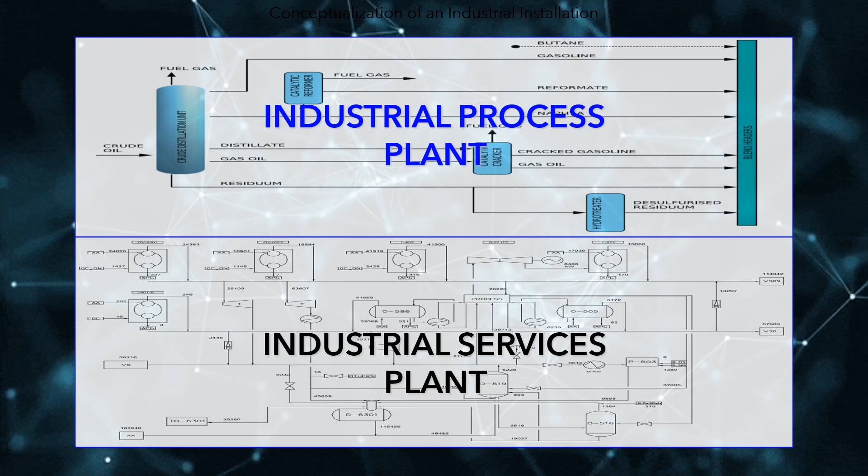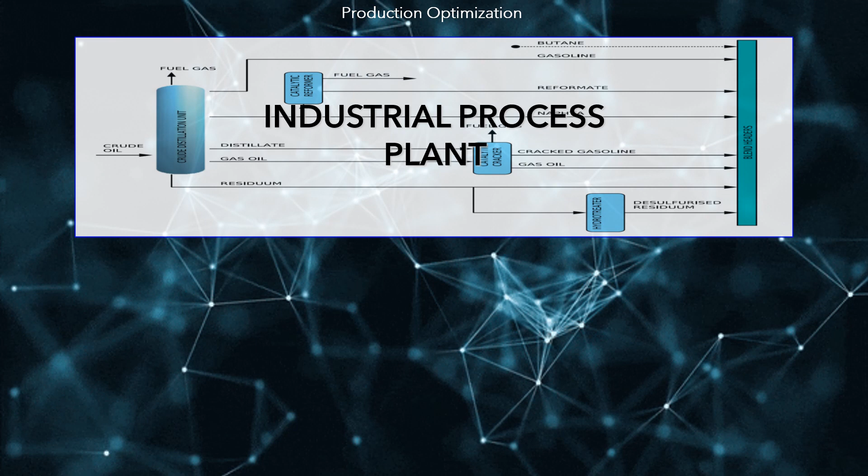To optimize energy efficiency, the first step is to optimize the integrated supply chain, since this is the part of the production process that consumes more economic resources. This lecture focuses on the mathematical modeling of service plants.

HAI-OIL-REF includes a generic model that can serve to plan, at the aggregate level, the crude and/or biomass refining processes. The level of aggregation is fundamentally related to the nonlinearities associated with this type of process, but not with the level of detail with which it is possible to represent the production processes, which can be spatially detailed in all units used in the production of refined products.

The objective of optimization is to determine the production plan that meets the demand for refined products, according to an offer of available crude types during the planning period.

Industrial services optimization is the complementary model to the production model, aimed at optimizing energy management in industrial plants that include large-scale industrial service plants, such as refineries, petrochemicals, oil and gas production, and oil and gas transport.

These services often include self-generation, cogeneration, and the exchange of energy with the interconnected electricity system. The objective of the model is to minimize the consumption, or cost, of the energy required by the industrial processes, supported by the industrial services plants.

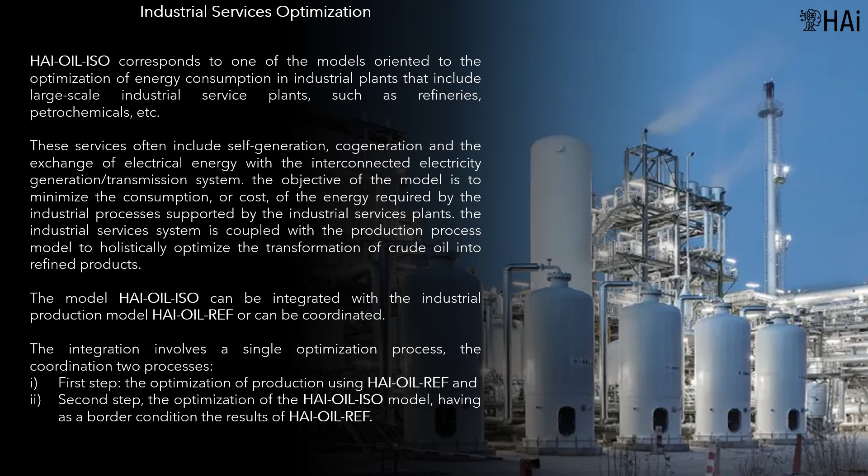The industrial services system is coupled with the production process model to holistically optimize the transformation of crude oil into refined products. Demand fluctuations are typical of utility or thermoelectric plants in petroleum refineries.

Among the major causes are changes in the oil feed properties, multiple operational campaigns, maintenance of process units, interruption of electric energy supply, and cost variations of fuels and electric energy.

On the other hand, utility systems are essential for the operational feasibility of refineries. They must continually adapt their production levels to satisfy such dynamic demand patterns.

Therefore, the designs of utility plants tend to present a high level of flexibility, thus allowing multiple operational configurations that satisfy the same demand targets, sometimes with significantly different operating costs.

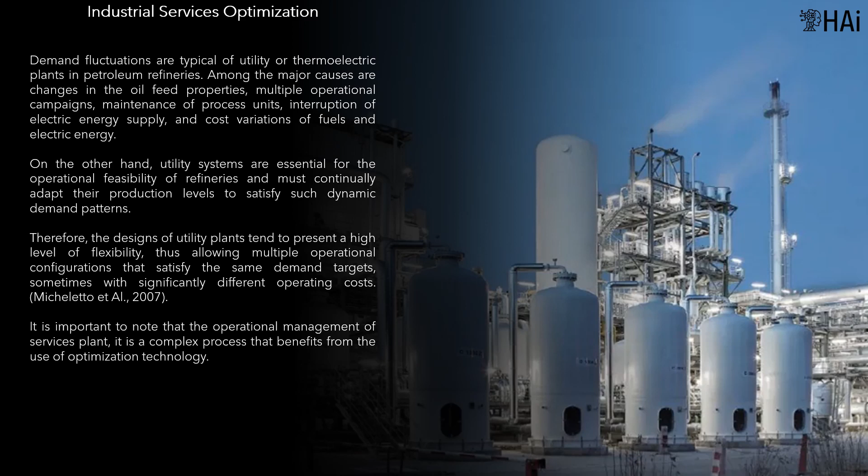It is important to note that the operational management of a services plant is a complex process that benefits from the use of optimization technology.

The main entities of the system are: process plant, a place in which various industrial operations are developed, including unit operations, to transform, adapt, or treat a particular raw material, to obtain products of greater added value.

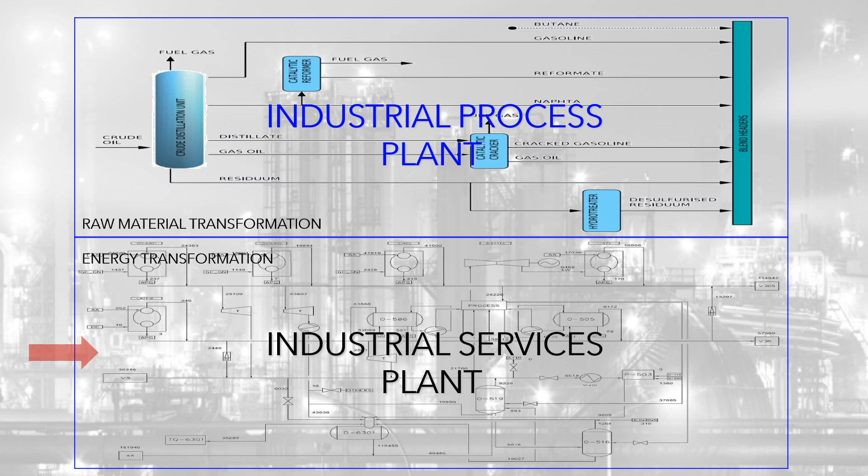Service plant: a place where various industrial operations related to the auxiliary services demanded by process plants are developed. Auxiliary service: essential services for the operation of any production system, they allow guaranteeing the quality and continuity of the process.

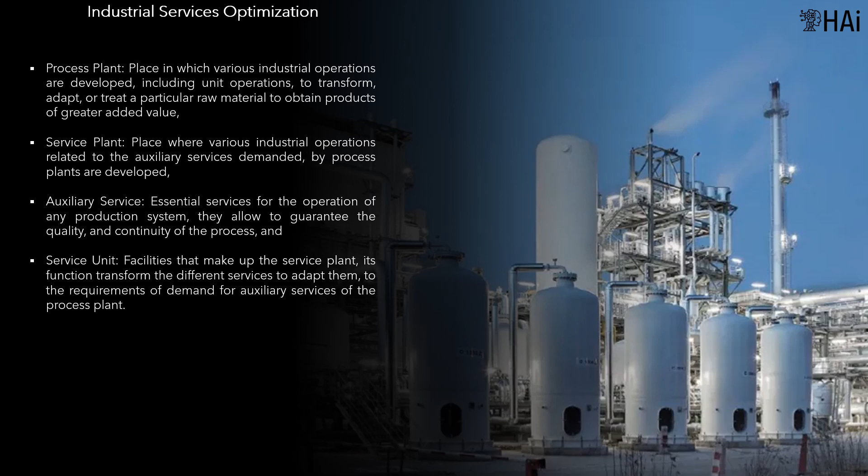And service unit: facilities that make up the service plant, whose function is to transform the different services to adapt them to the requirements of demand for auxiliary services of the process plant.

The processes that govern energy exchange and fluid dynamics are nonlinear processes. The optimal point of operation of the units of the service system varies depending on the flow, the temperature, and the pressure handled by the unit.

Efficiency is a nonlinear indicator of great importance, with which the amount produced can be related compared to the amount of raw material used. For the management of this indicator, it is necessary to have an adequate data acquisition system, which ensures the correct measurement of the parameters that facilitate its use.

In service plants, we find different types of units that interact and interconnect with other units to transform one service into another service.

Different types of service units are used to describe the process, although the diversity of units and functionality of each of them is clear. Within the modeling, they will be considered as a single entity, characterized by the value of the parameters that define it.

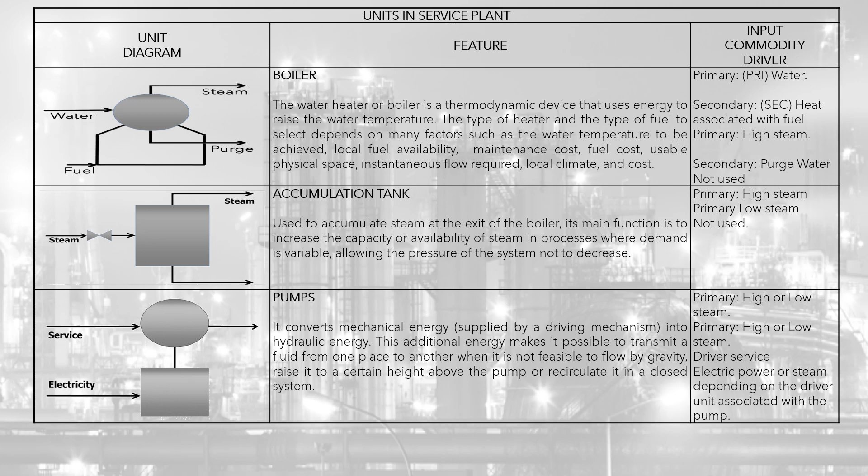These parameters refer to input, product, and driver. The table presents the main units that make up the service plant, and their basic functions.

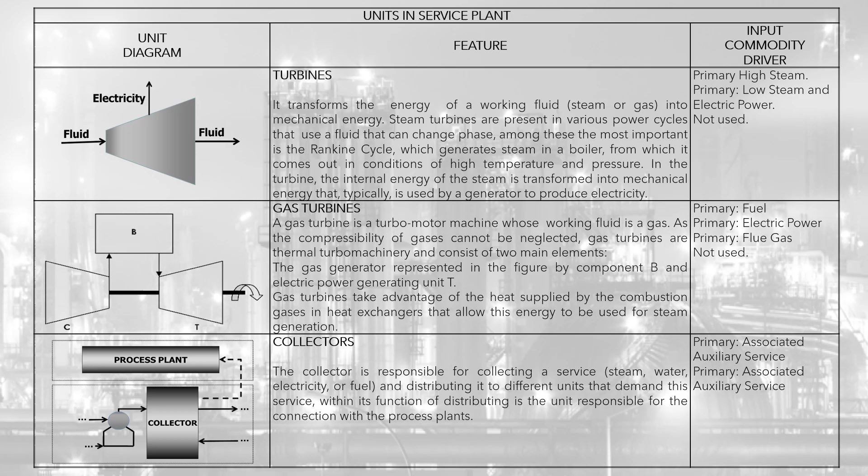Units such as pumps, boilers, accumulation tanks and valves, condensers, manifolds, and steam turbines are specified. Icons are included to manage the connectivity of the processes, something typical for the engineers in charge of handling the diagrams of the plants.

There are other fundamental elements for the proper functioning of the service plant, such as measuring units to control the operating conditions of the units, such as pressure gauges, thermometers, water level indicators, flow meters for steam, alarm and control devices, among others.

These elements are not handled as entities within the mathematical model that represents the service plant, but they are of great importance, since they make up the data acquisition system, fundamental to the state estimation modeling process.

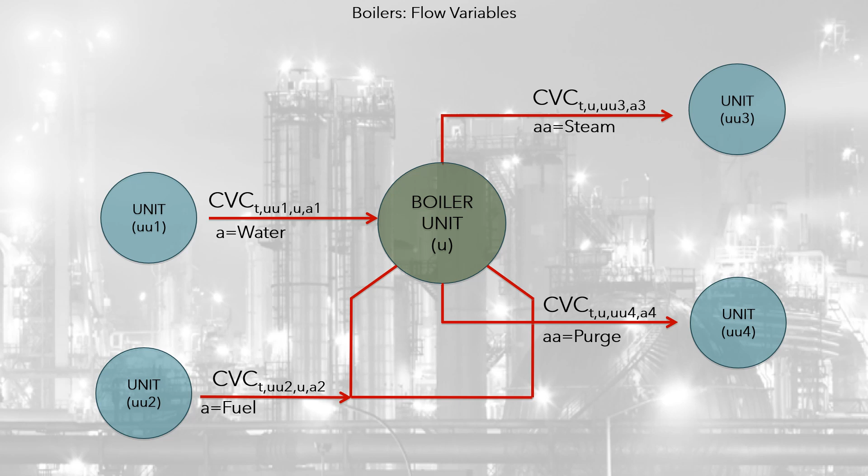The interaction of the auxiliary services plant with the industrial process plant is carried out through the demand made by each process unit. This demand can be exogenous, when the industrial service plant optimization model is connected in series with the results of the industrial process plant models. This type of connection is called coordinated.

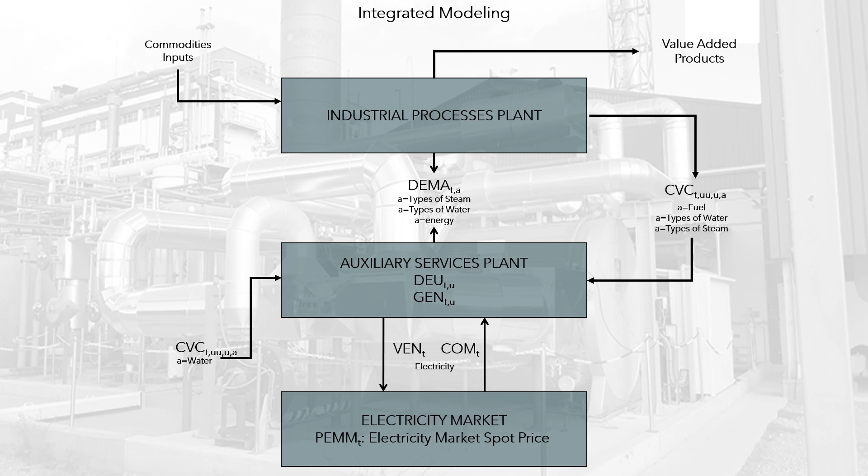If optimization is performed integrally in a single model, the demand will be one of the decision variables of the model. This type of connection is called integrated. Integrated models, if they can be solved, produce greater benefit than coordinated ones.

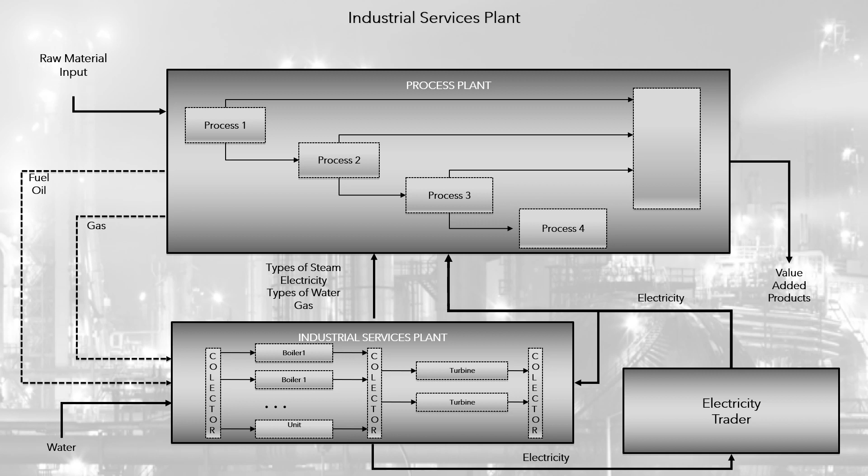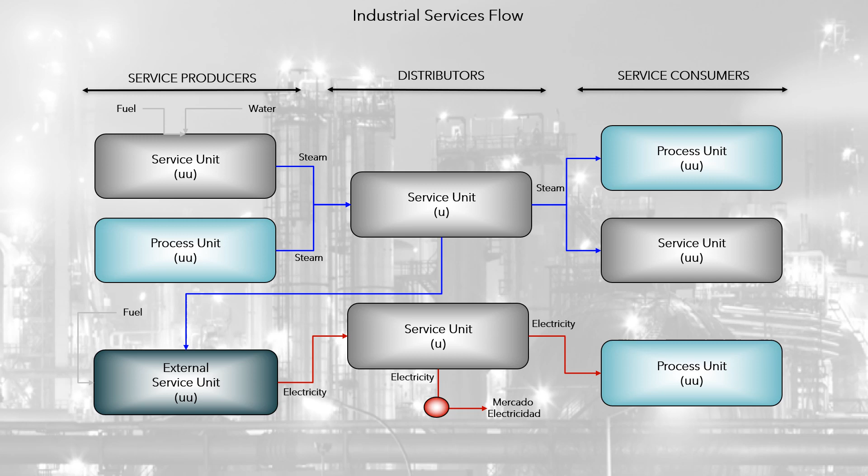In a services plant, service units fulfill specific functions. In the figure, we can see producing units, collecting or distributing units, and consuming units. External services that are not produced in the plant, supplied in some cases by the process plant, must be considered. For example, the refinery supplies fuel oil, gas, and steam to the service plant, or by service providers, which can be modeled as an external unit.

Again, in a services plant, service units fulfill specific functions: producing units, collecting or distributing units, and consuming units. External services not produced in the plant, supplied in some cases by the process plant or by service providers, must be considered and can be modeled as an external unit.

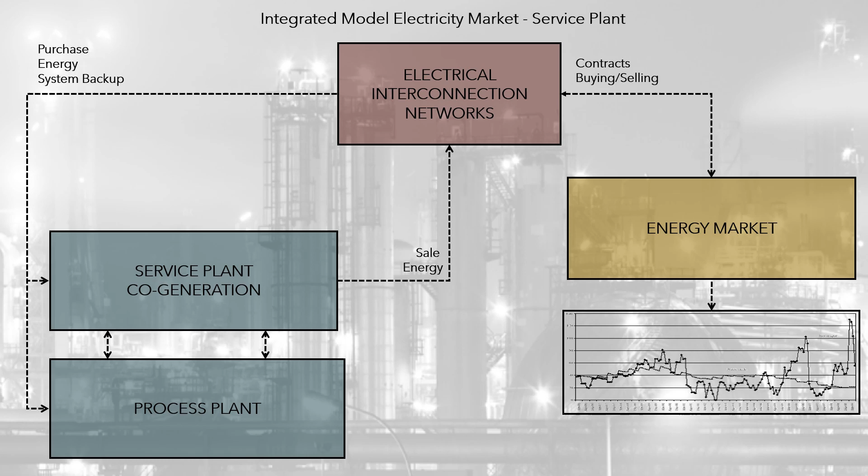The simultaneous optimization of both industrial production and energy conversion is related to polluting emissions of gases and liquids, associated with increasingly demanding environmental control laws.

HI may integrate complex industrial process models to redesign the power supply system, according to the new power technologies. This type of model includes the simulation of polluting processes to determine the optimal mixture of fuels, in accordance with environmental regulations.

Considering that the energy market allows the integration of multiple factories of different types, all composed of process plants and service plants, it is possible to integrate all the optimization process, physically integrating the service plants, and virtually the transactions in the markets. This is the real problem of a global, and/or multi-business company.

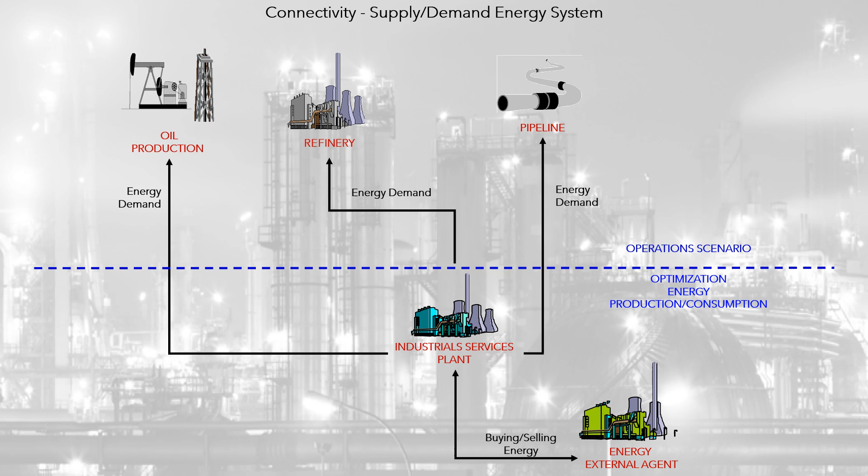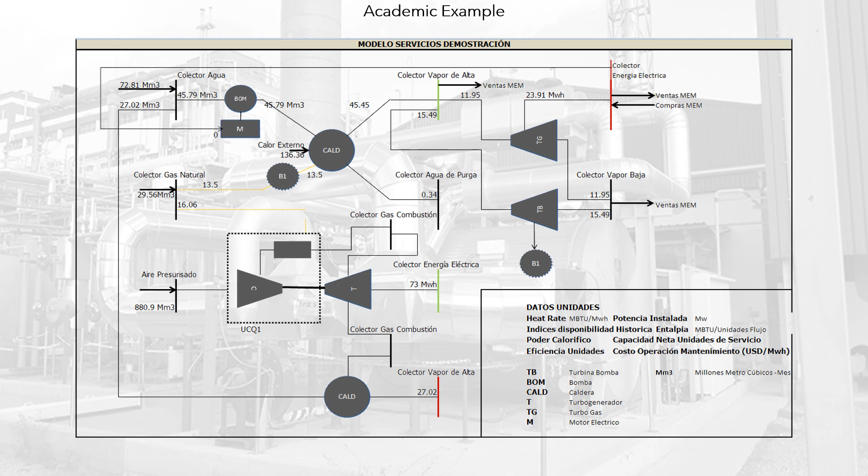Case: Industrial Services Optimization. This is an academic example of the HI ISO model, developed by HI, for a company in the oil sector. The diagram presents the service plant considered for the academic example. The model was applied to an oil production field, and its service plant.

The diagram shows the connectivity of the system that provides electricity and steam, and consumes fuels in its production. In addition, it connects to the national electricity grid to buy or sell electricity.

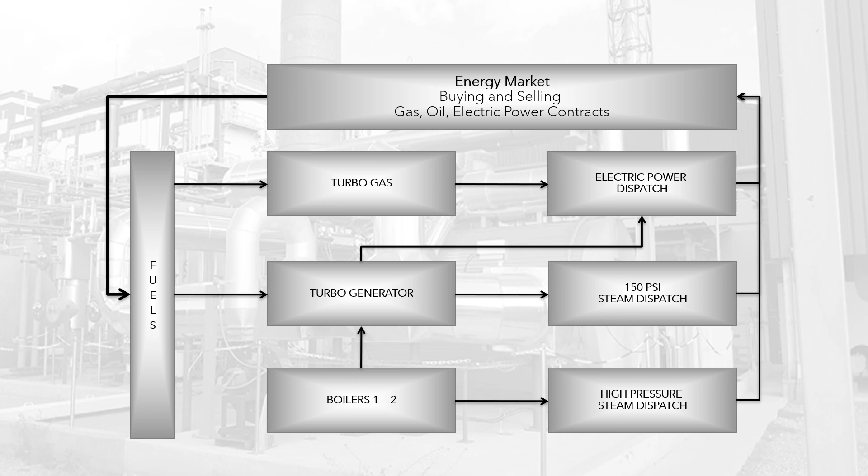To simulate the electricity demand in the national electricity grid model, each consumption node has its own demand, and its own load curve, or load duration curve. In general, it is assumed that a typical day is simulated, for each node and for each period of the simulation horizon.

To consider daily seasonal variations, it should be noted that there are no limits on the number of blocks into which the period can be divided. Therefore, multiple typical days of consumption can be dispatched, for example, holiday or Sunday, Saturday, and business day.

Load blocks can be associated with a sequence of hours, and can be associated with power plants, mainly hydro plants, for which a daily operation cycle is planned.

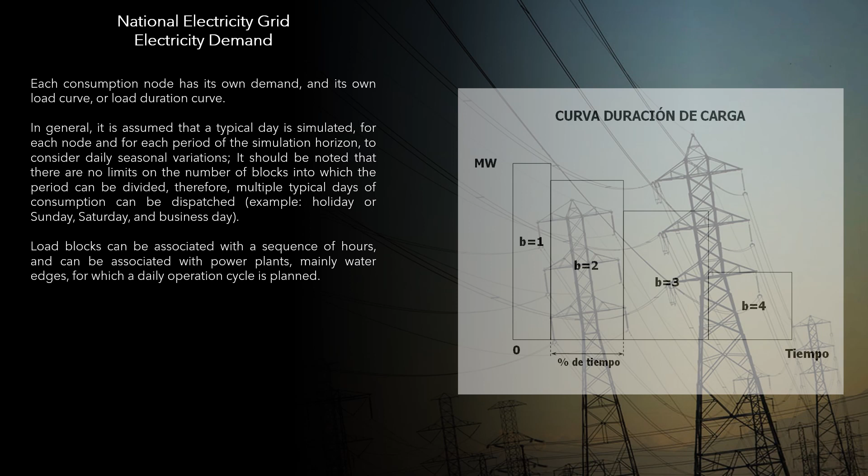Since the load and prices of electricity vary during the day, in many cases it is desirable, or necessary, to synchronize the operation of the services plant with the electricity market at the regional, or national, level. This is since energy flows can change during the day.

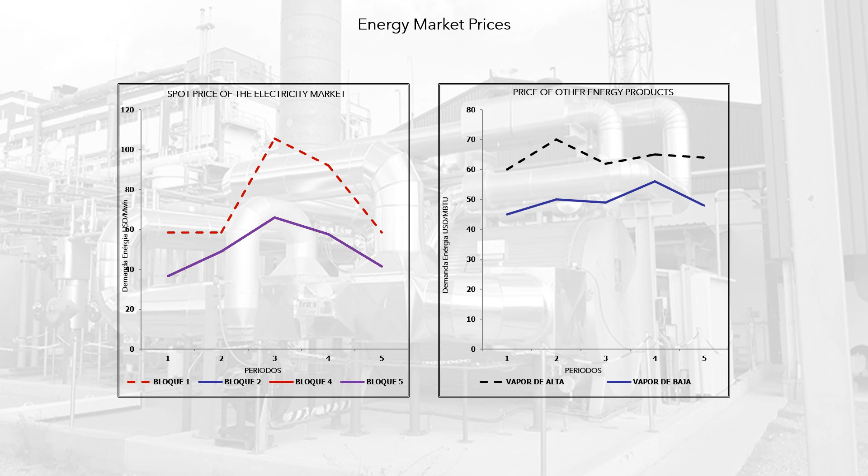The graphs show the prices of electricity and steam. In this case, 5 load blocks are considered for each period of the planning horizon. The price of steam is considered constant per period, while the price of electricity is discriminated by 5 blocks. The highest price will be block 1, with the highest load, and the lowest price will be block 5, with the lowest load. The price of gas is uniform by period, but varies significantly throughout the different periods. The lower the availability, the higher the price.

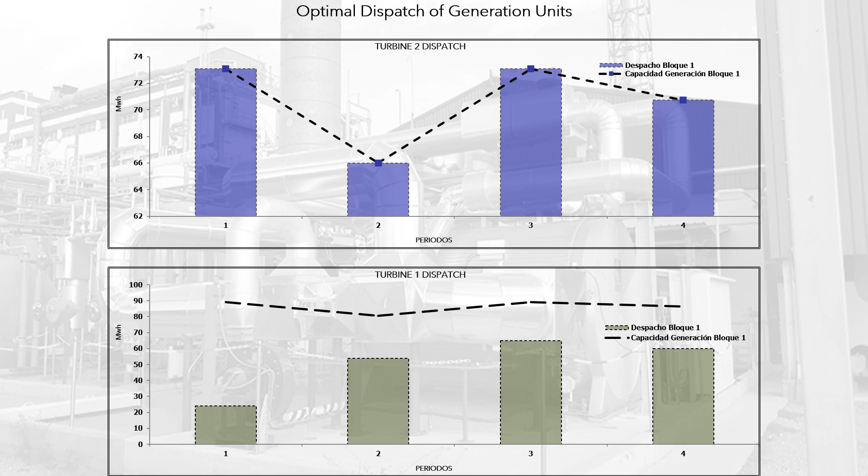One of the results is the optimal dispatch of generation units, which will vary by period and by block. Since electricity is dispatched by block, the same will be true for natural gas.

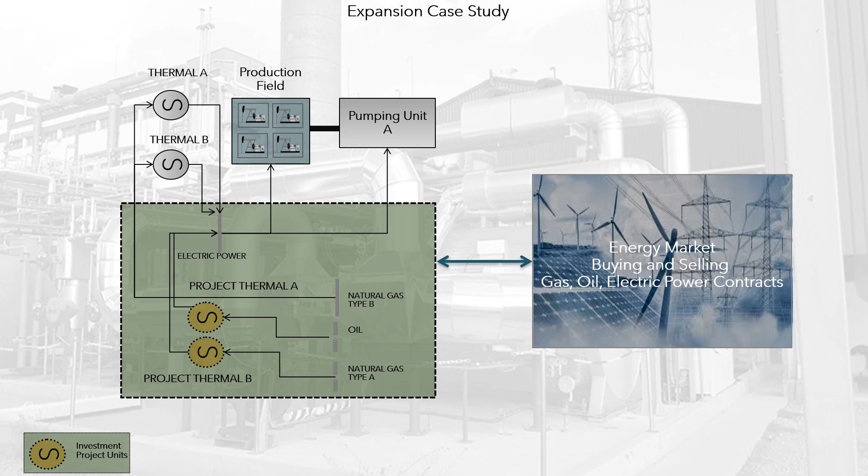Another case in which mathematical models are effective is in the expansion of service plants. In this case, the installation of 1 or 2 additional thermal plants is being studied, and its connection with the national interconnected system.

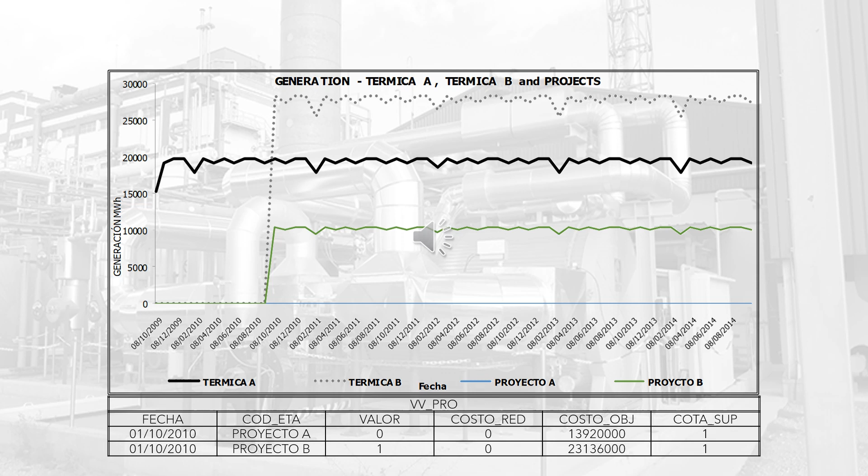The analysis of the projects was carried out under the following scenario: fuel availability is restricted, and there is a 50% increase in electricity demand projections. For the cost of dispatch, the results were $39.69 million with projects, and $40.105 million without projects. The difference was 1.02%. The graph shows the dispatch of the 4 finished thermal plants. As you can see, project A is not used.

Case: Integrated optimization in Petrobras.

This case is based on the paper Operational Optimization of the Utility System of an Oil Refinery. The Petrobras Recap Refinery develops a mathematical programming model, applied to the operational planning of the utility plant, as well as its interconnections with the process units.

The problem is formulated as a mixed integer linear programming (MILP) model where the mass and energy balances, the operational status of each unit, and the demand satisfaction are defined in multiple time periods.

The model determines the operational configuration of the plant by minimizing utility costs, and identifies steam losses as well as inefficient units by comparing the optimal solutions with the current operation.

The MILP can accurately represent the topology, and optimize the operation of the real-world system, under different utility demands and abnormal situations in single and multi-period scenarios.

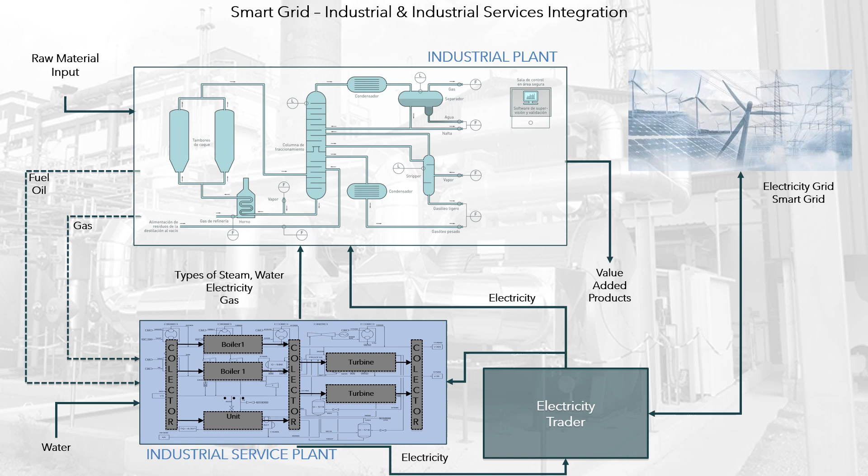Continuous and binary variables are defined for the proposed model. For instance, continuous variables represent the flow rates between the units, whereas binary variables denote the operating state of the unit, on or off. These variables are defined for every period T of the horizon considered.

It is assumed that the units and external sources, for example electricity concessionary, can complement internal generation, and therefore supply the sets of variable demands in each period.

Description of the utility system. The figure presents the simplified flowchart of the Recap central utility system, in which each unit connected to utility header UT is represented by a rectangle that contains its identification.

This configuration considers only the systems that are subject to optimization. The initials used to identify the entities of the system are: J for pumps and ejectors, GV or L for furnaces and boilers, M for heat exchangers, O or P for vessels, TF for valves, and V for blowers and compressors.

The utilities considered in the optimization problem are superheated steam (V30S), saturated steam (V30) and its condensate (CV30), bar steam (V5) and its condensate (CV5), and 1 bar steam (V1) and its condensate (CV1).

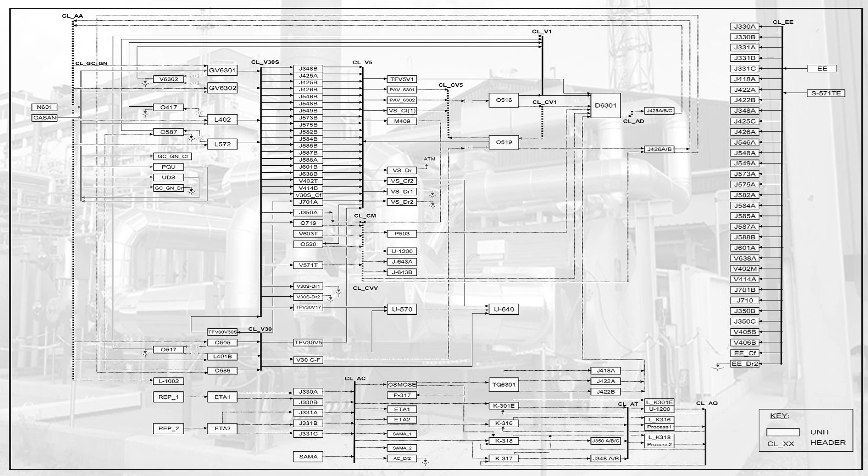There are also two other headers for condensate, CVV and CM, which originate from the vacuum system of the process condensation turbines. The images present the indexes and sets used in the model.

Therefore, units with fixed operation do not need to be modeled, and their operating variables are simply included as parameters that are calculated from material and energy balances. For a given header of utility UT, their aggregated values are given as a summation in the term denoted UTCF.

An example of the simplifications introduced to represent the headers is shown in the figure. For the case of the V30S network, each unit is represented by a rectangle that contains its identification, and it is associated to the branch that symbolizes the process area to which it belongs.

The minus sign under each rectangle indicates V30S consumption, whereas the plus sign denotes its production. Figure 2b shows the modeled system.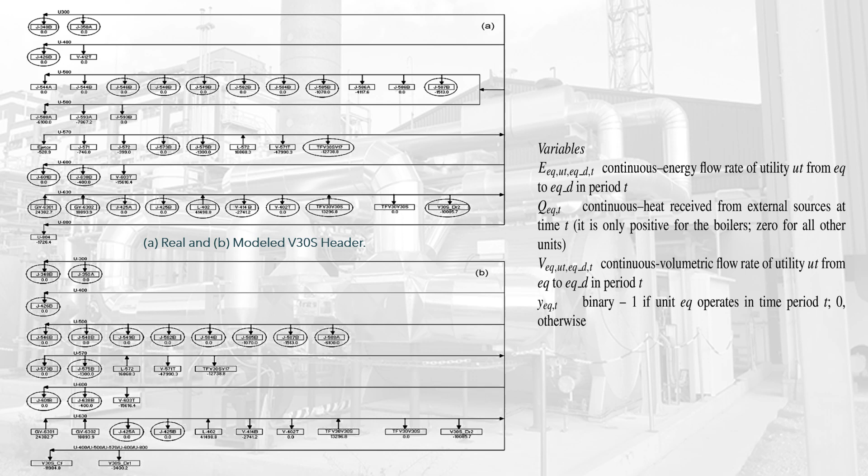The images present the parameters used by the model. A unit may produce and consume one or multiple utilities.

If a unit produces utility UT, it is sent to its corresponding header. Similarly, if utility UT is consumed in a certain unit, it is sent from its corresponding header. The figure generalizes this idea for every header of utility UT, denoted by CLUT.

In this figure, the utility stream UT that is generated in unit EQ is sent to header CLUT at time T with flow rate V(EQ,UT,CLUT,T).

This header receives all the streams of utilities that are produced in the same time period from all EQ, which are mixed at the temperature and pressure conditions of the header. Similarly, header CLUT sends utility UT at time period T to consumption units.

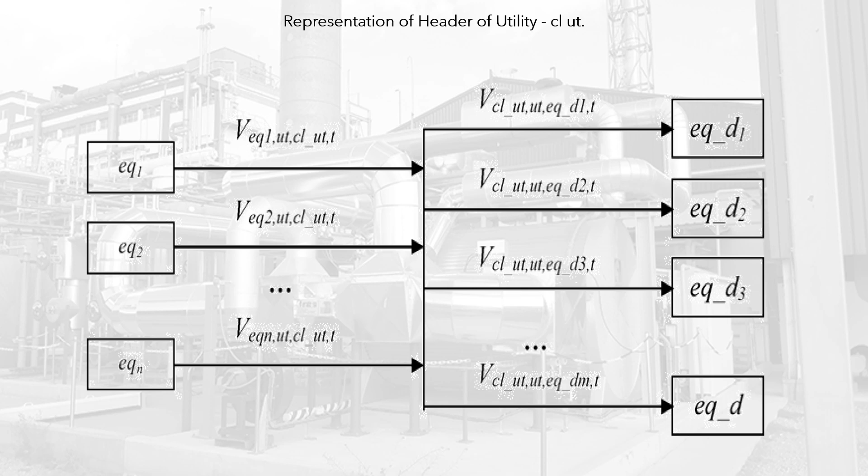A decision variable Y(EQ,T) is associated with flow rate variable V(EQ,UT,EQ,T). The image presents the main service units included in the model: boiler, vessel, pump with electrical drivers, and pump with turbine drivers.

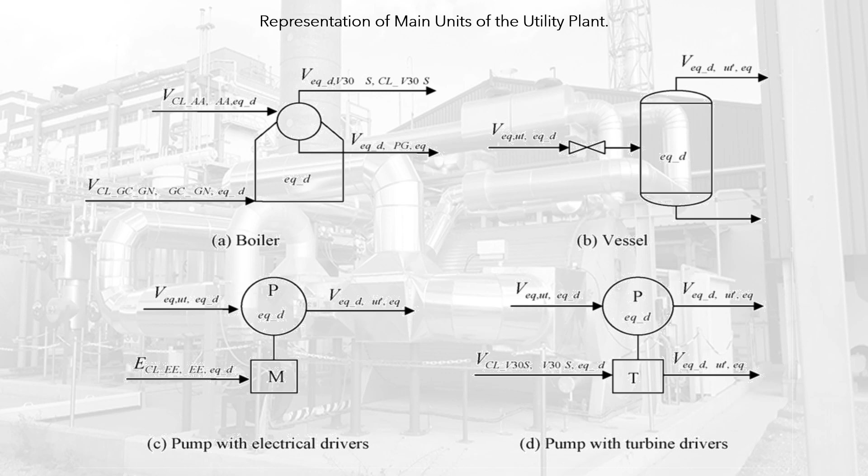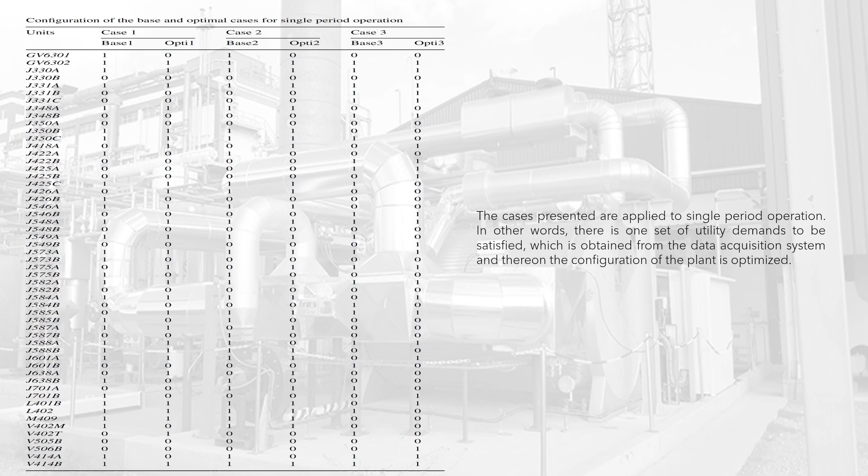The cases presented are applied to single period operation. In other words, there is one set of utility demands to be satisfied, obtained from the data acquisition system, and thereon the configuration of the plant is optimized. Different single period scenarios are considered.

Firstly, the model was validated to verify consistency of the formulation, basically by eliminating the degrees of freedom and providing reference values for the economic objective function as well as for the operating conditions of the optimization model. For this reason, 3 base cases were developed: base 1, base 2 and base 3, corresponding to 3 different operational conditions of the plant.

Cases base 1 and base 2 correspond to operational conditions of the plant in typical days, without abnormalities. The objective in this study is to validate the model, and to evaluate the effect of the manual planning in the operation, in particular its economic impact.

Case base 3 considers an atypical situation given by the shutdown of U570, which generates a large portion of EE, as well as V30 and V30S.

The table presents the comparison of the base cases with the solution of the mathematical model. 1 means that the associated unit is up and running.

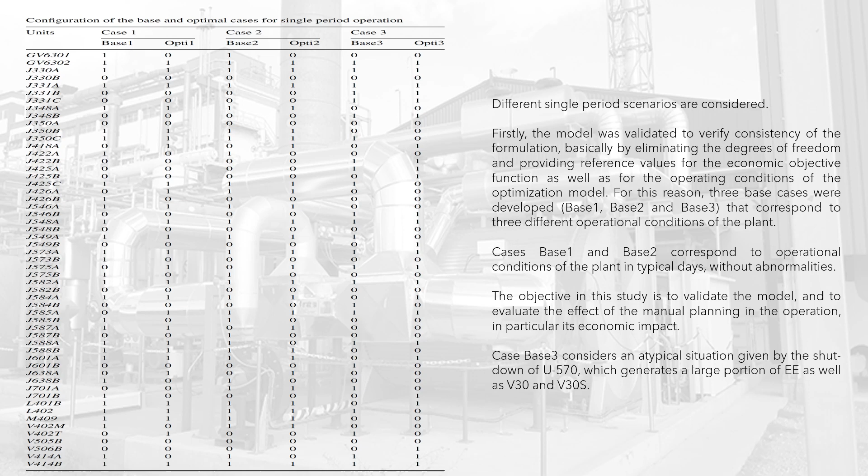The table presents the flow rates of the electric energy and fuel streams that can be optimized. It also shows the base case and optimal results for the amounts of utilities that compose the objective function, as well as their prices and corresponding operating costs.

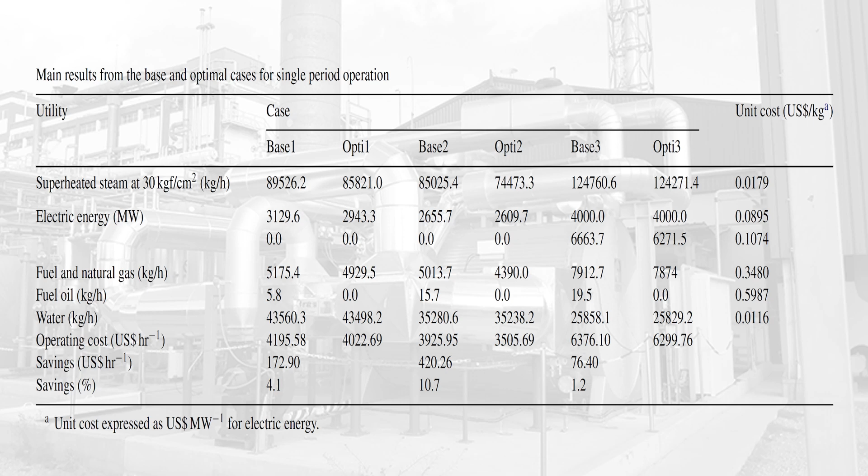The examples show that lower cost alternatives are obtained with the optimization approaches. These alternatives would not have been considered in real-world operation, based on the configurations that are usually operated in the plant. Moreover, these are practicable solutions that satisfy the plant constraints and the set of utility demands.

In the Opti4 case study, the demand profile results from frequent operational abnormalities, such as the shutdown of Unit US3, loss in the electricity supply from the third-party concessionary responsible for 25% of the electricity demand, and shutdown of the turbo expander/electric generator unit that satisfies part of the electricity demand.

And the shutdown of the L572 heat recovery boiler, which reduces the availability of the steam generated by the recovery of energy from the process.

Due to units shutdown, it becomes necessary to relate all flow rates to and from the process units and headers with binary variables that represent their operational state.

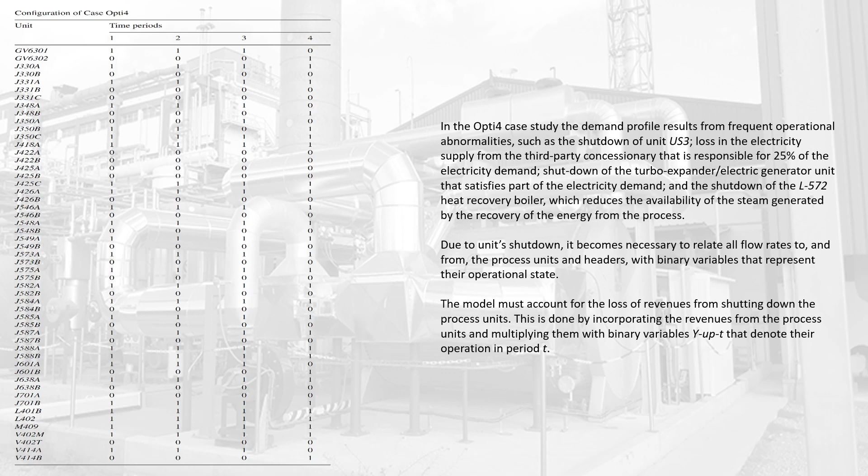The model must account for the loss of revenues from shutting down the process units. This is done by incorporating the revenues from the process units and multiplying them with binary variables that denote their operation in each period. The optimal solution for Opti4 is presented in tables.

The optimal operating costs obtained in time periods 1, 2, 3 and 4 are $3,472, $3,472, $4,334, and $4,695 per hour, respectively. The revenue loss due to the shutdown of Unit US3 was $41,846 per hour.

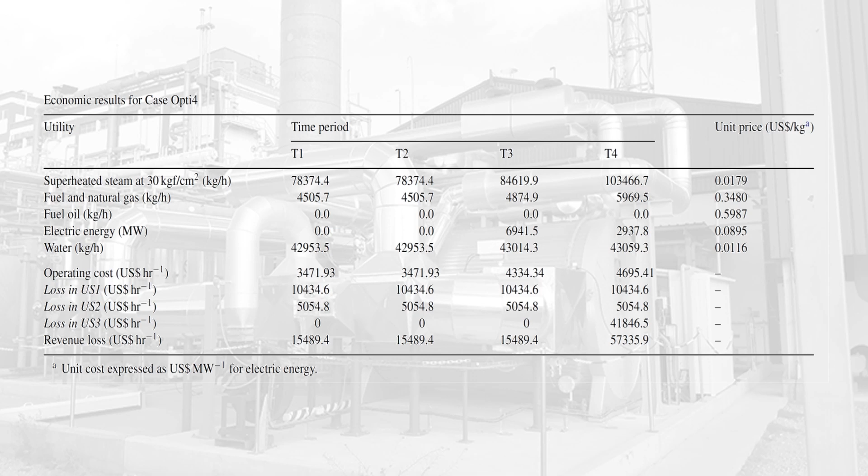Finally, the last case study presented consists of a problem with 12 periods. For the first four time periods, the data are the same as the Opti4 case, and from then on with variable utility demands. The optimal profiles of the main utilities, electricity, superheated steam, water, and fuel and natural gas, are given.

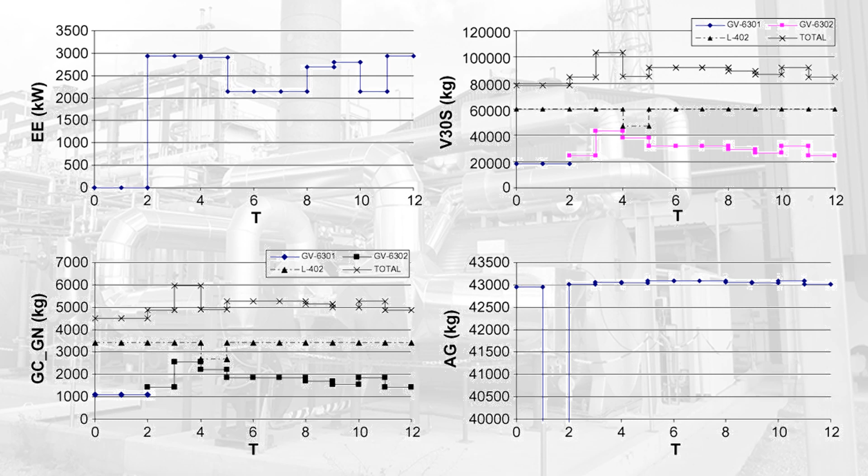The next step is to energetically integrate the system with the entire refinery, to further improve the operation of the system. More complex multi-period scenarios were studied that consider the existing flexibility in the industrial plant.

These correspond to changes in the operating conditions and in the configuration of the processes, interruption of electric energy supply from the local concessionary, equipment shutdown, for example, propylene unit, turbo expander electric generator, and results in a variable utility demand along the time periods and generated an average savings of 3 to 5%.

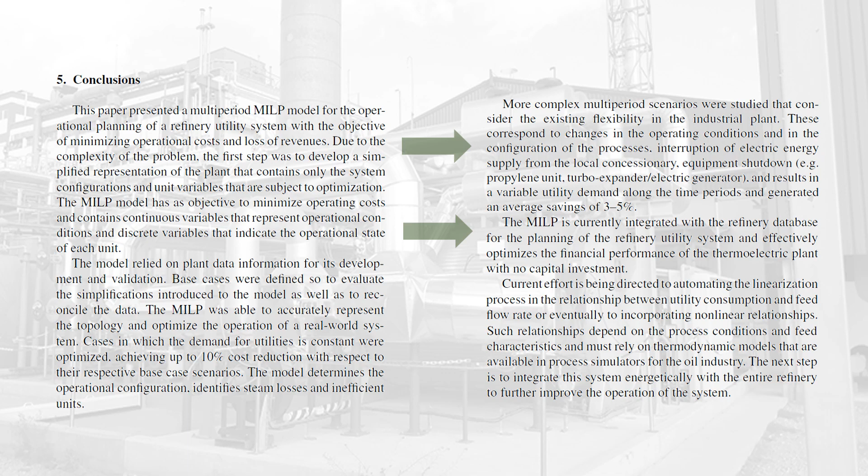The MILP is currently integrated with the refinery database for the planning of the refinery utility system and effectively optimizes the financial performance of the thermoelectric plant with no capital investment.

The Petrobras mathematical model can accurately represent the topology and optimize the operation of the real-world system under different utility demands and abnormal situations in single and multi-period scenarios.

The model is currently integrated with the Petrobras plant database and used for the planning of the RECAP refinery utility system, achieving up to 10.7% reduction cost in static optimization for redesign of the configuration of the service plant, and 3 to 5% average savings for dynamic operation of the integrated systems. All this in controlled experiments.